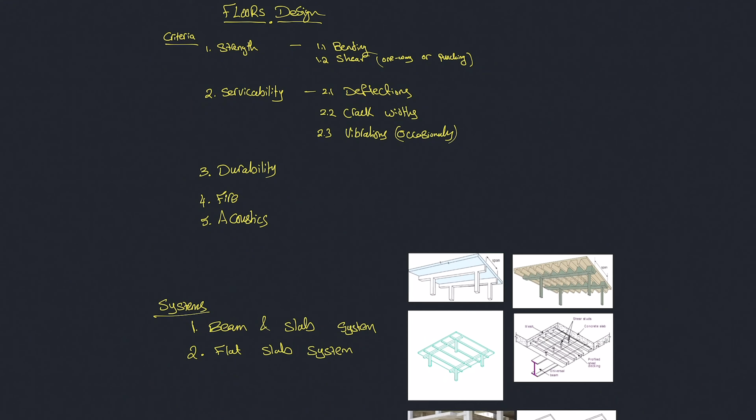Hello and welcome again. So to start with, we're going to be looking at the content that we're going to be going through for our floors design in this series of videos.

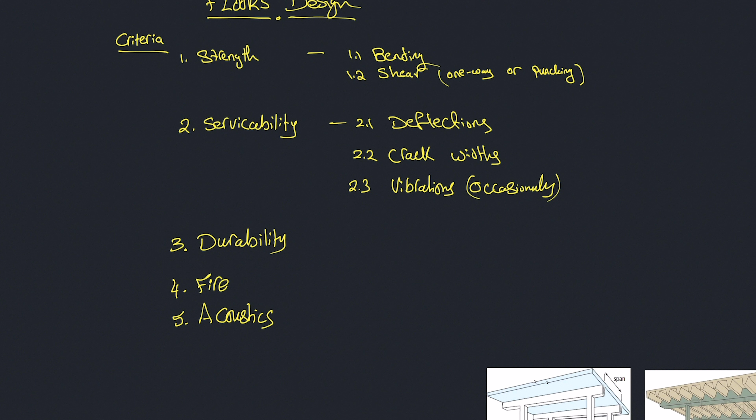The criteria that we are designing our floors for is typically these four, and to some extent five with the acoustic in some situations: strength design, serviceability design, durability design, fire design, and acoustic design.

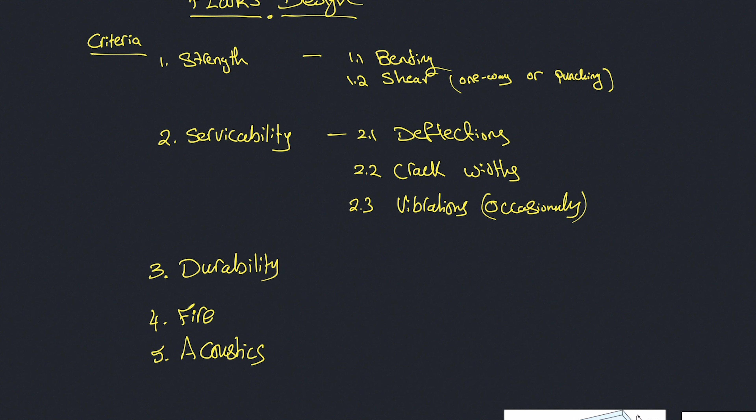To start with strength, it's fairly common - everybody can understand that slabs and floors are typically designed for strength. Everyone is clear on what is bending, I'm assuming, and everyone is clear on shear, whether it's a one-way shear or a punching shear.

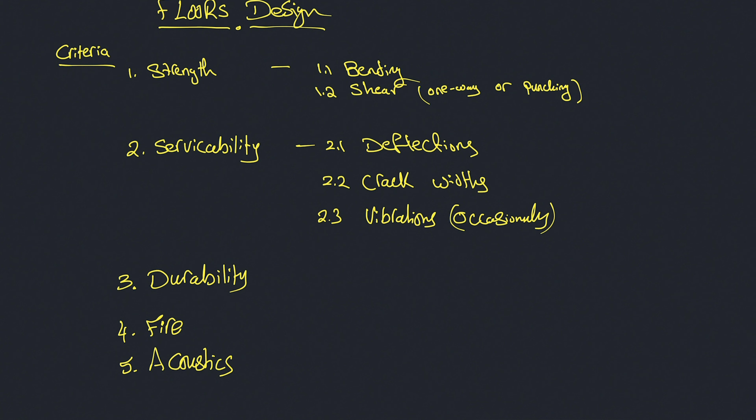Serviceability design is more to do with the function of the building, and it's to do with limiting the deflection of the floors, the cracking of the concrete floors, and the vibration of the floor as well, so it's comfortable for the people using the building and doesn't stop the functionality of the building.

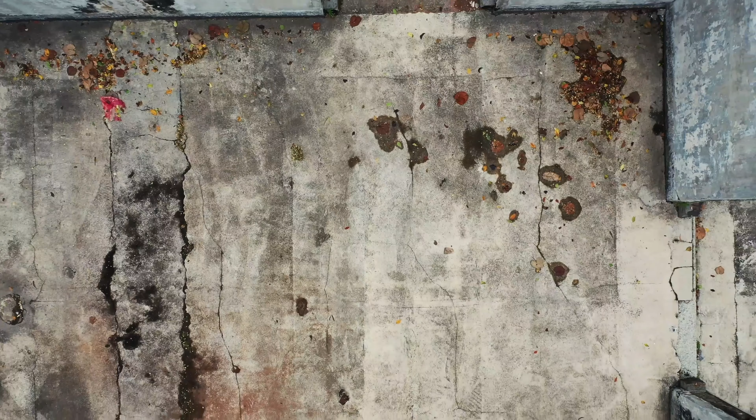Durability design is more to do with protecting the steel reinforcement in the concrete from actually corroding in the long term, especially due to being near to the sea or being in contact with the ground, or just the carbonation of concrete over time.

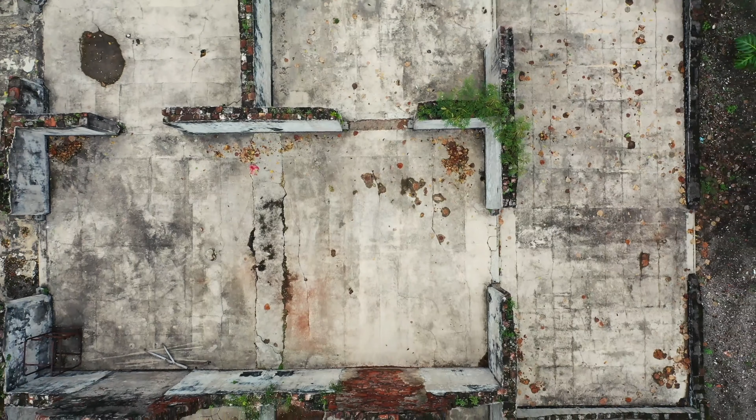Fire design is to do with maintaining the integrity and the structural strength of the building during a fire event. We usually design buildings for certain times because no building can withstand fire forever, but the building needs to stand fire for a sufficient period of time until the firemen can arrive on site and rescue the people before the building collapses or before the fire is put out.

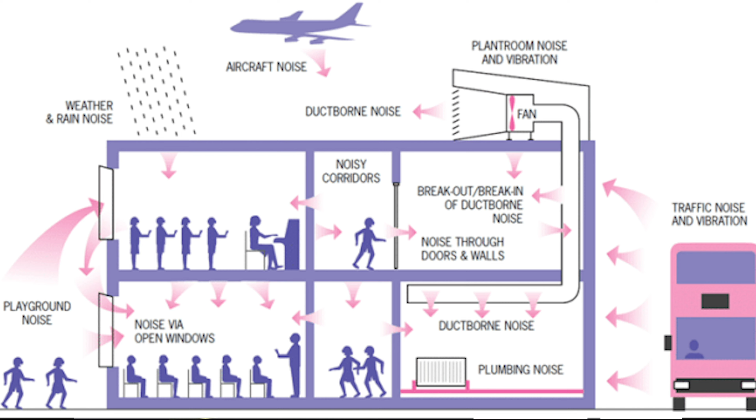Acoustics is to do with the acoustic performance between the floors, so you and the neighbor below and the neighbor above don't hear a lot of noise, especially if there's something like a car park below your building, or machinery like a water chiller plant. There are certain acoustic requirements sometimes required to be incorporated into the floor's design. It's not much of a structural engineering task, but it's a criteria we always take into account when we design our floors.

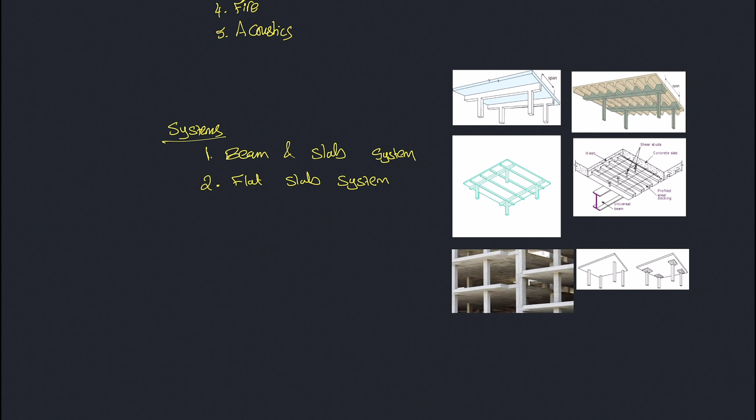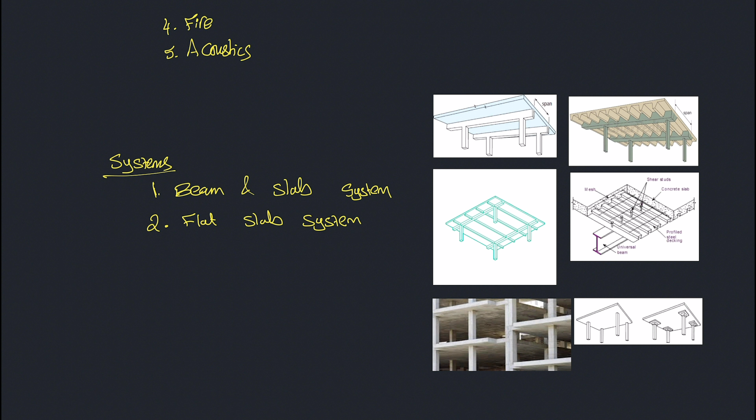Now that we understand the 5 floor design criteria we're going to be going through in this series of design videos, let's look at the systems of floors that actually exist. In my opinion, there are probably only 2 types of systems you'll ever come across: either a beam and slab system or a flat slab system.

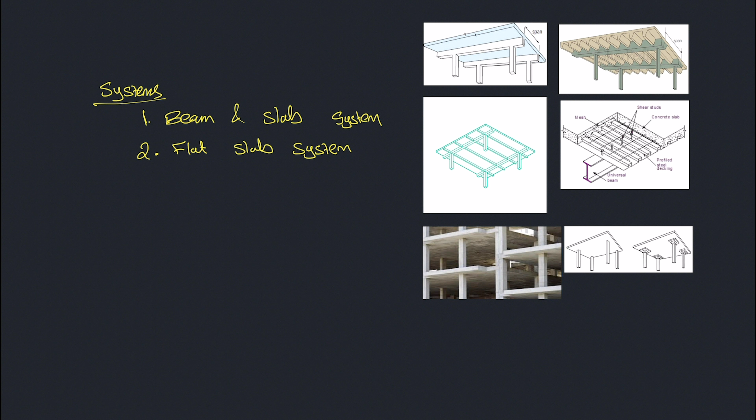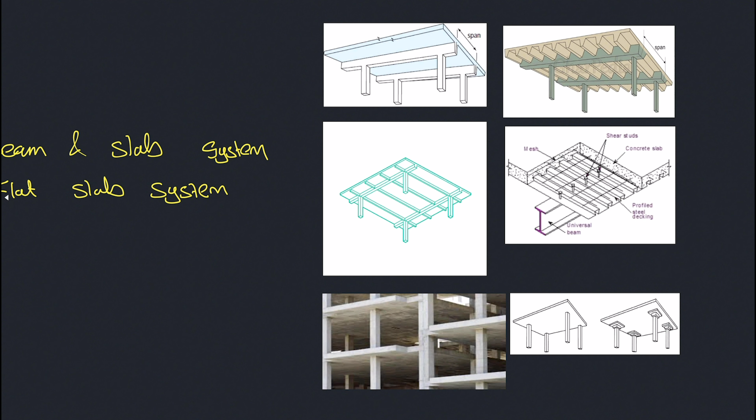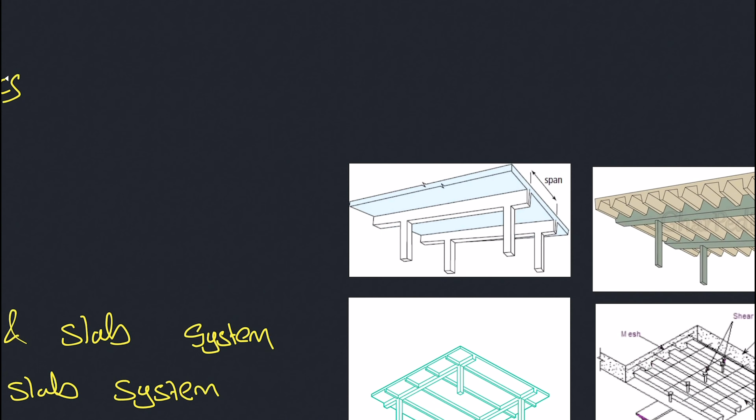The beam and slab is the most efficient system you can probably use, and it has a lot of different forms of usage. The traditional one has a beam spanning between columns and the slab spans between the beams, and this can be a concrete system or a steel system where you have a steel beam, on top of it a metal deck, and on top of that a concrete topping slab that spans between the steel beams.

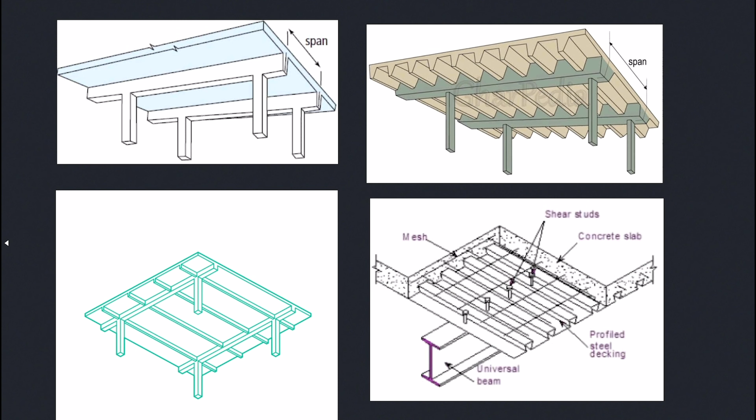It can be in the form of a lot of secondary beams as well - again concrete and/or steel beams - or it can be a waffle slab in some cases, or a ribbed slab where you have a lot of small joists that reduce the span a lot for the slab. These joists basically span the load back into the main beams, often called girder beams or primary beams.

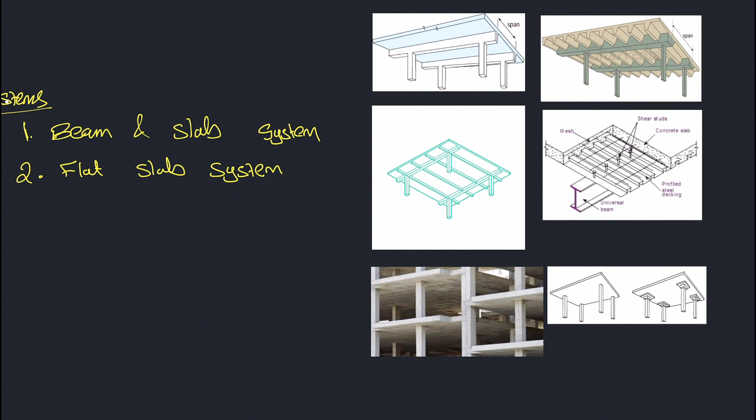Now the other type of system, a flat slab system, is where you don't have any beams - it's just a plate, basically a slab that spans between the columns directly. This type of system typically has issues with punching shear, where the slabs fail locally around the column because it's too thin. So you might often find drop panels below the slab around the column areas.

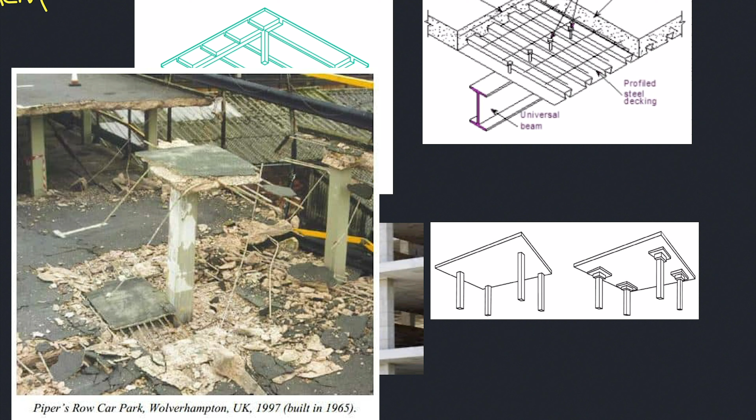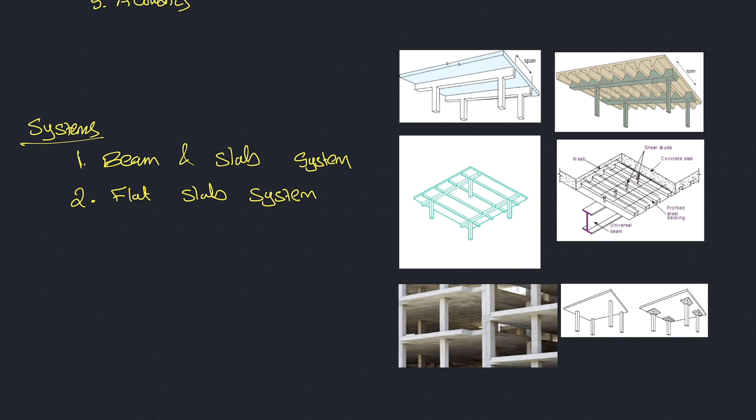It doesn't make much sense to actually go for a flat slab system in terms of material usage compared to a simple beam and slab system, but it does make sense in terms of constructability and in terms of end use of the building.

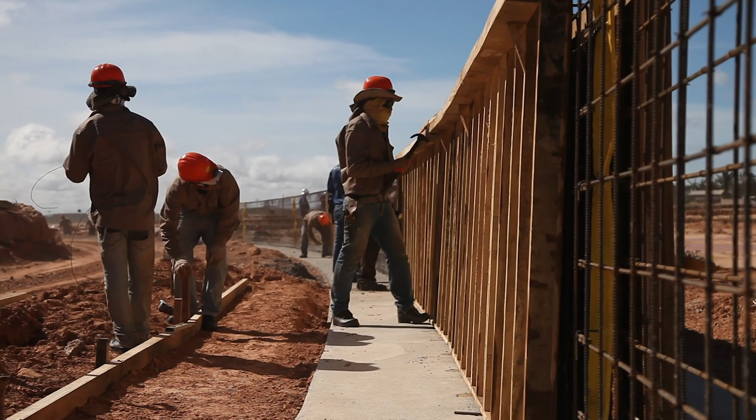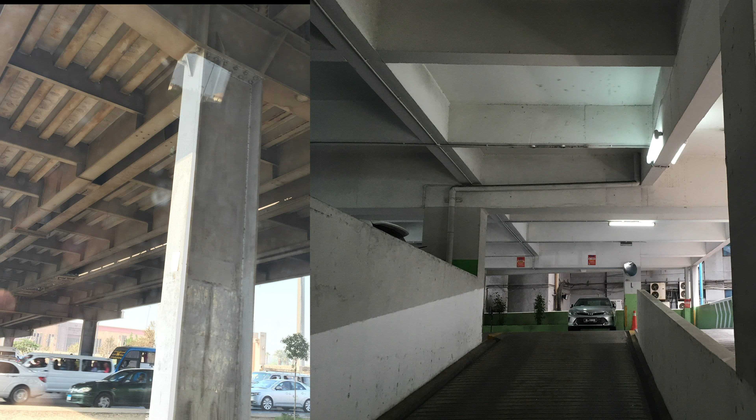In some countries, labor is actually quite expensive, and forming all the beams in a building can end up being more costly than just pouring a thicker slab throughout that doesn't need so much time to form on site. The other reason is, if the concrete is exposed, nobody really wants to look at the ugly system of beams and slabs on top of them.

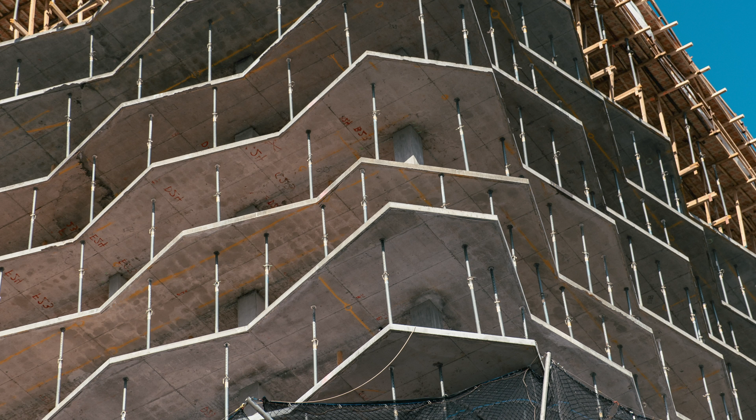It doesn't feel nice, but if it's just a flat slab, it's actually not too bad to look at. In some cases, it can be exposed concrete as it is, or it can be painted black, which is quite modern decoration and interior design these days. It also saves on the cost of having to put up ceilings. So it does have its merits and benefits as well.

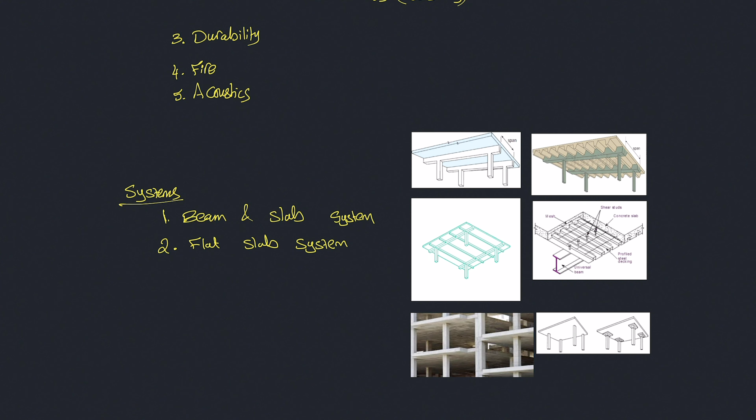In the next few videos, we'll explore the design of these two systems - beam and slab, as well as flat slabs - against these 5 design criteria. See you in the next video.